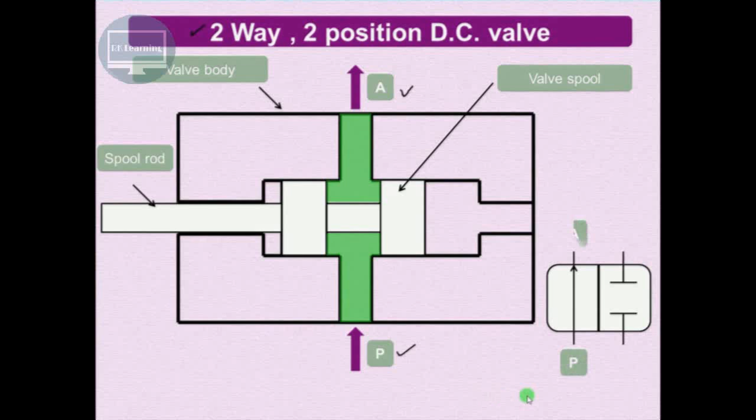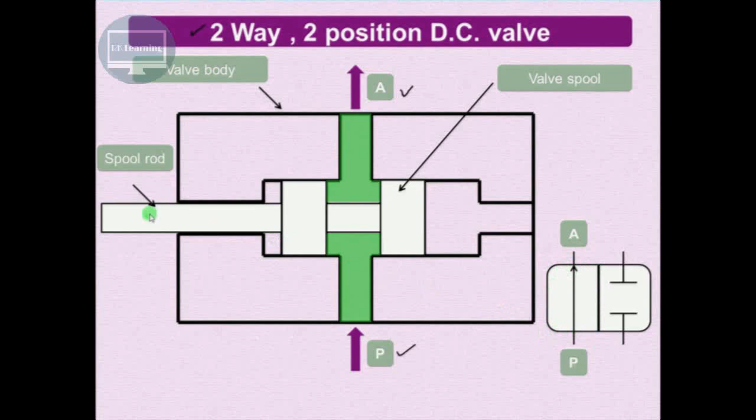The fluid enters the port P, and for the given position of the spool, the flow will take place from P to A as shown over here. And on the symbol also you can show this. So from port P to port A, the flow is taking place, that is indicated by this left envelope mode of the symbol. Now when this spool is operated in such a way that it moves towards right, then...

As you can see over here, when it moves towards right, it will block this port, so the fluid cannot enter. The flow can't take place from port P to port A, so it is a blocked position. That is indicated over here. So port P and A are blocked. In this way, the two-way, two-position direction control valve works.

The two-way stands for port P and A, and the two positions are this particular left envelope and right envelope mode. In the left envelope mode, as we have already seen, the flow is taking place from P to A, whereas in case of the right envelope mode, both ports, that is the pump port or pressure port and the cylinder port A, are blocked. So there are two ways, P and A, and two positions, left and right envelope mode.

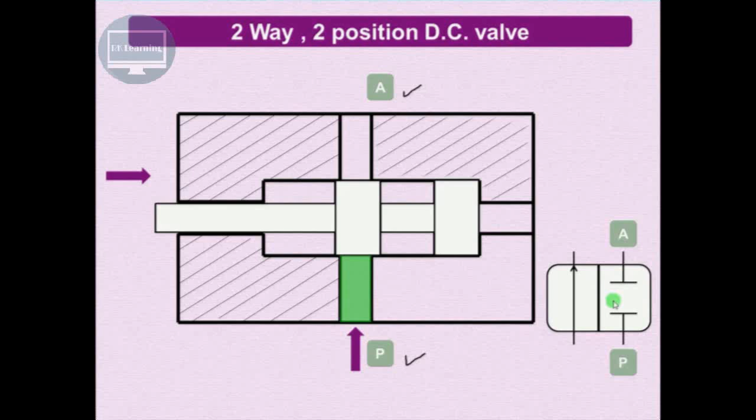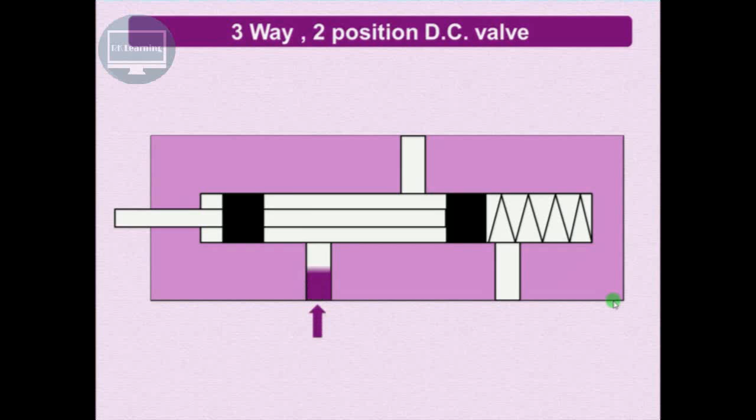Let us try to understand the working of the three-way, two-position direction control valve. As you can see over here, the flow will take place from port P to port A, and for this particular position of the spool, which is spring operated or rather spring controlled, this particular port is blocked because of the position of this spool. So we can say that the reservoir port R is blocked over here. That is indicated on this symbol.

As you can see over here, the flow will take place from P to A, that is indicated by this arrow from P to A, whereas the reservoir port R is blocked. That is indicated by this block position. So from P to A, and R is blocked. Now if we operate or move this spool manually or electrically towards right, then it will compress this spring, and what will happen, we'll see in the next position.

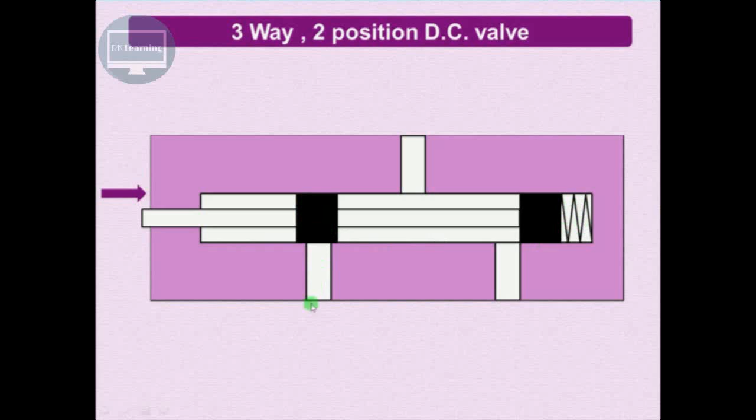As indicated over here, this is the symbol for manually operated and spring control direction control valve. So when we operate this spool towards right, the spring will get compressed, and the position of this spool is such that this port is blocked. So now the flow can take place from port A to the port R, whereas the pump port P is blocked over here, and that is indicated on this symbol also.

As you can see over here, the flow is taking place from A to R, that is indicated by this arrow over here, whereas the port P is blocked. So in this way we are having three ways, that is port P, A and R, and two positions, that is left envelope and right envelope mode, and therefore this is known as three-way, two-position direction control valve.

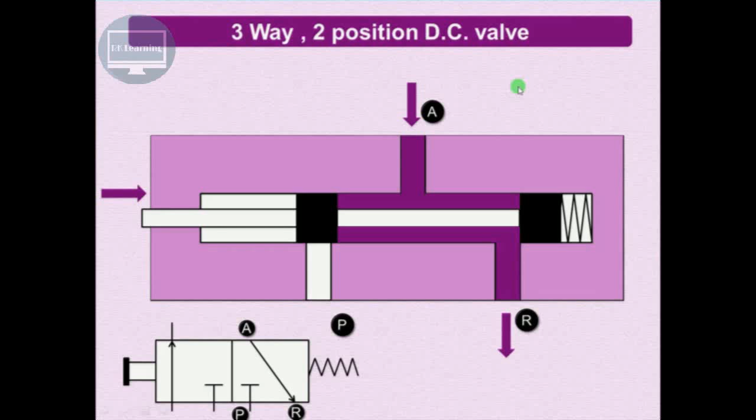Now let us try to understand the working of the four-way, two-position direction control valve. For the given particular position, we are having the spool at the extreme right side. So this is the spool along with this spool rod, and it is at the extreme right side, and you can see over here, because of the position of this spool, this internal passage is blocked.

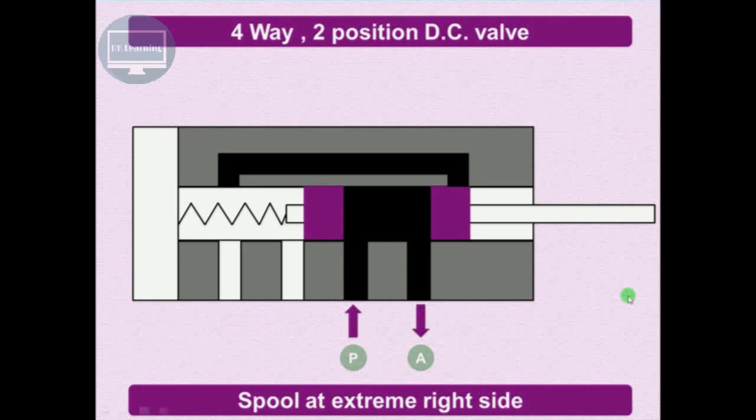So in this particular case, the fluid will enter from pump port or pressure port P, and the flow will take place from P towards cylinder port A. Similarly, the flow can take place from the cylinder port B to the reservoir port R, and that is indicated in this particular left envelope mode.

So from P to A, as we have already seen, the flow is taking place from P to A like this, and from B to R. So the flow is taking place from B to R. So that is indicated over here in the left envelope mode.

And again, this is a manually operated spring control direction control valve. It is having 4 ports, that is P, A, B and R. Therefore it is a 4-way, and there are 2 positions, that is the left envelope and right envelope mode.

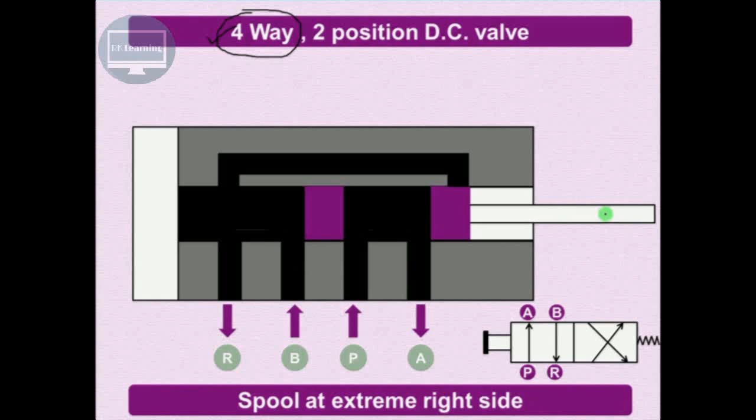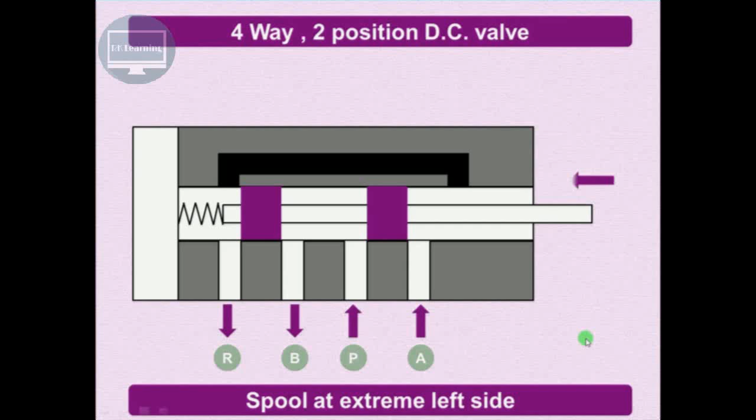So let us see what will happen when we push this spool towards the left. The spring will get compressed and now the flow will take place through this internal passage from A. It will come over here, fill this entire passage, and through this passage it will go to the reservoir port R. So the flow is taking place from A to R.

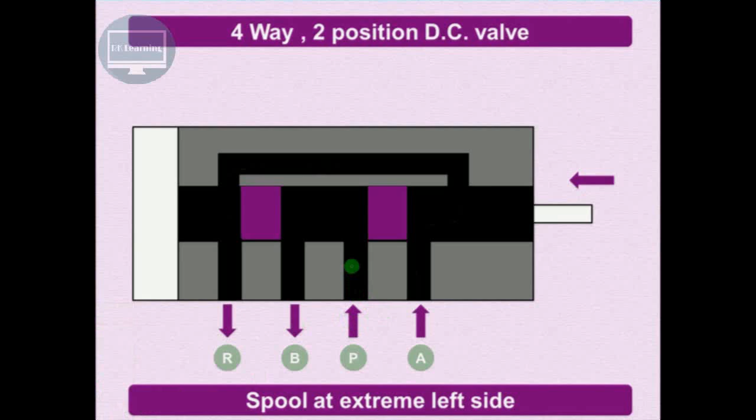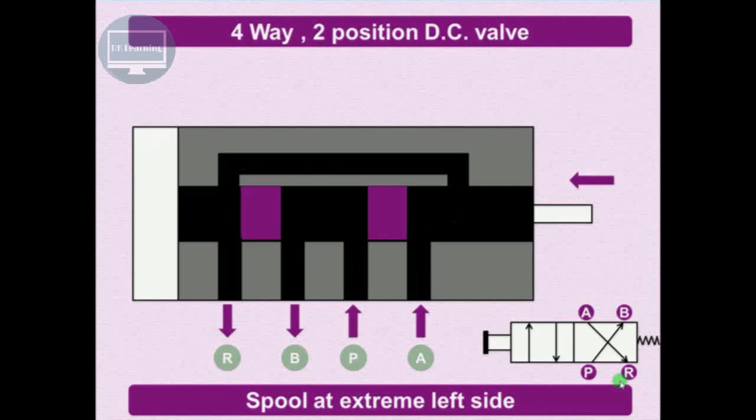Similarly, the flow can take place from P to B also. So from P, the flow will take place to B. That is indicated in the right envelope mode. So from P to B, the flow is taking place, as we have just seen, and from A to R also, as indicated by this particular arrow. So in this way, the working of 4-way 2-position direction control valve will take place.

Now let us see the operation of 4-way 3-position direction control valve, and in this particular case we have used the rotary spool.

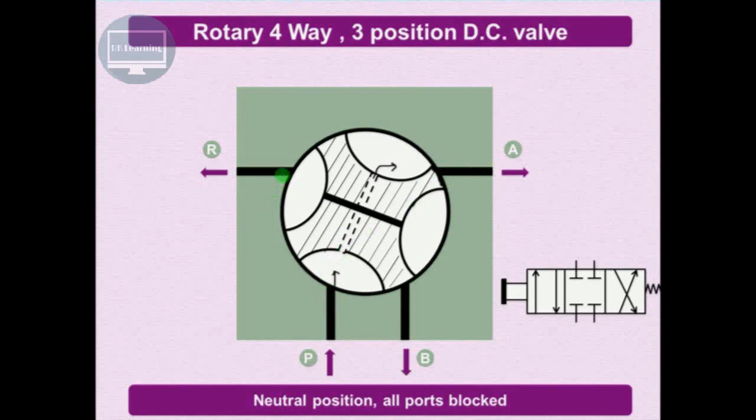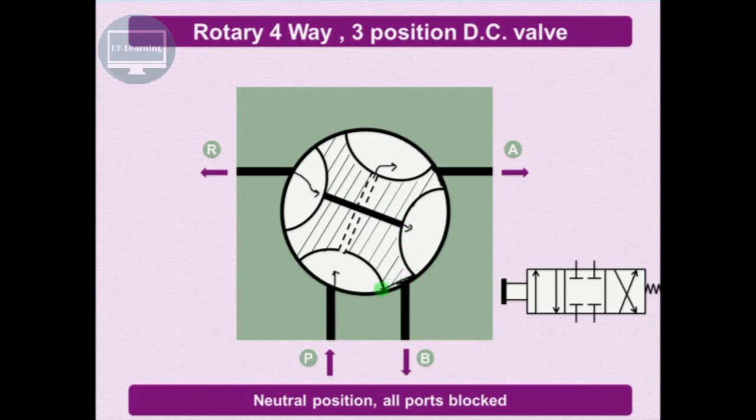Similarly, if the fluid wants to flow from reservoir port R, then it can come up to this point, but it cannot go to the port P because it is blocked over here. So you can see this blocking by this spool. The port is not open over here, so port P is blocked. So that is indicated by these positions. So you can say that this is a neutral position where all the ports, that is P, A, B and R, are blocked, and that is known as a neutral position.

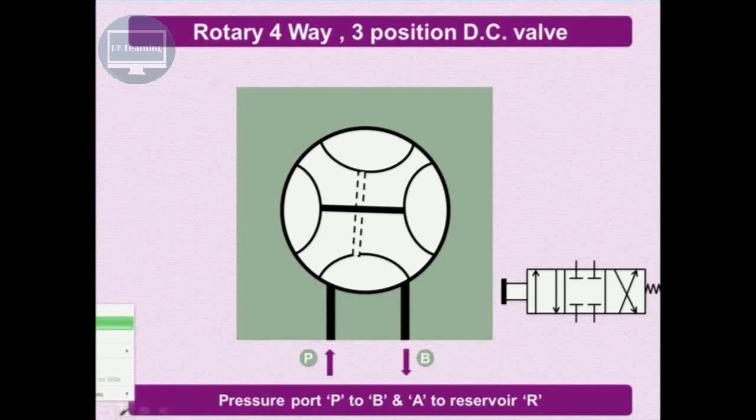Now, when we further rotate the spool in such a way that we can have the flow take place from the port P, it will come from this port P, then it will go to this particular port, that is B. So the flow is taking place in this particular direction.

Similarly, from A also it can go to the reservoir port R. So from A the flow can take place, it will come over here, and from this it can go to the port R. So that's indicated in the right envelope mode. So from P to B, and then from...